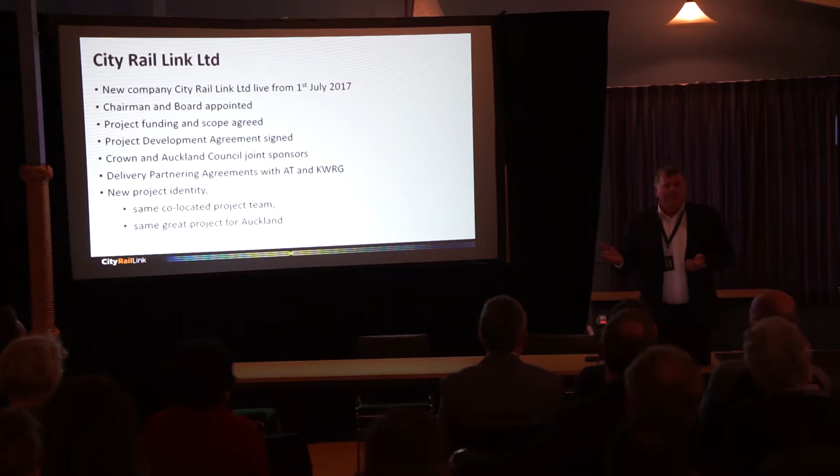So our identity changes. We are no longer part of Auckland Transport, although quite frankly we still work very closely with them because they ultimately, along with KiwiRail and others, will be taking the asset that we create once we finish. So a number of agreements are being put in place to make sure that that is happening and that we get all of their input into the delivery of the project itself.

So from a planned outcomes point of view, it's really important to restate this every time we present so that everyone understands what our objectives are, because we're delivering this amazingly attractive, safe railway that will transform transport through the city centre. Currently 20 trains an hour go into Britomart, and all of them have to stop. The drivers and train crew have to get out, walk to the other end, get in the other end of the train, and the train has to chug back out again. So that's 20 trains an hour.

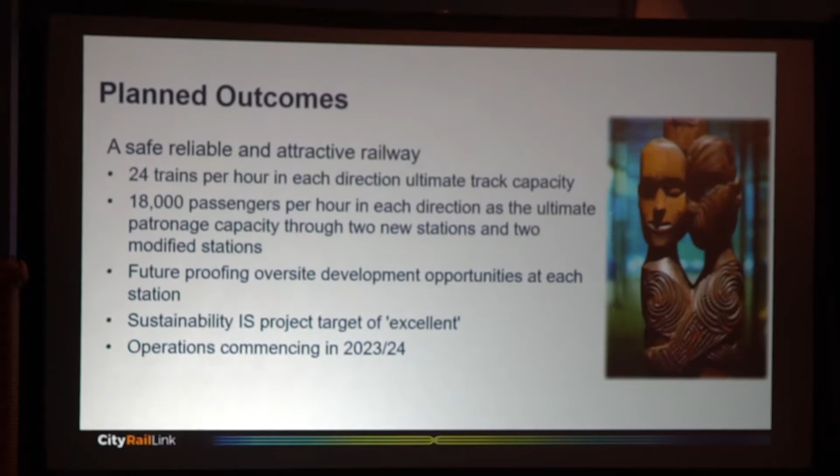We will be delivering 24 trains an hour in each direction, 48 trains an hour into the city centre, which means we have the capability of delivering 36,000 people into the CBD in the peak hour of every day. Now that compares with what Britomart currently has. In the peak hour it has about 8,000, 7,500. So this is a real step change in the way transport can be provided to the city centre.

We've got the future-proofing that we provide at each of our stations for commercial development, because that's the right thing to do. We're not commercial developers; we are future-proofing for that to happen by others. So we provide the extra concrete and structure in the ground to carry the load points to be able to develop above the entrances.

We're aiming for the project to be incredibly sustainable. Some of the new practices we're bringing from a sustainability point of view are being borrowed from our cousins in Australia, but tweaked for our use in New Zealand. But we're breaking new ground, and we're also exceeding our targets of excellent in the IS rating table for the works that we've already done. So we're ahead of target already, and we aim to stay there.

From a point of view of the completion, everyone gets worried about when we complete. All of these big projects take time, and I'm quite used to that. This is the 4th big project I've worked on, and we're due to complete in 2023-24 and commence operations. So these things do take time, but that's nothing to be worried about. If you go around the world, it's a fairly typical timescale for projects of this size.

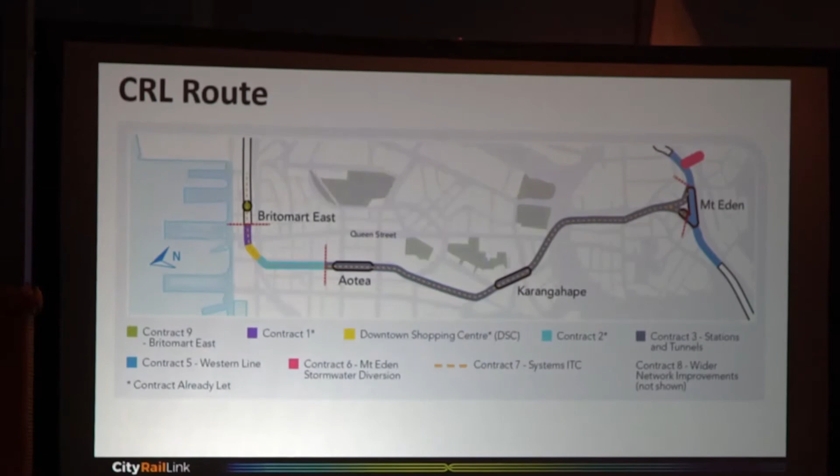And the difficulty there, of course, is that we go through a whole series of different geological layers, and we call this climbing the hill. Railways don't like hills by and large, but we have a 70-odd metre difference between Britomart, where the tracks exist, and the Western Line at Mount Eden, where the tracks exist, and we must join the dots. So we have to climb at a 3.5% gradient through very soggy, waterlogged mud at Britomart, go through some quite soft East Coast Bays sandstones going up Albert Street, until we get to the station at Aotea, level platform.

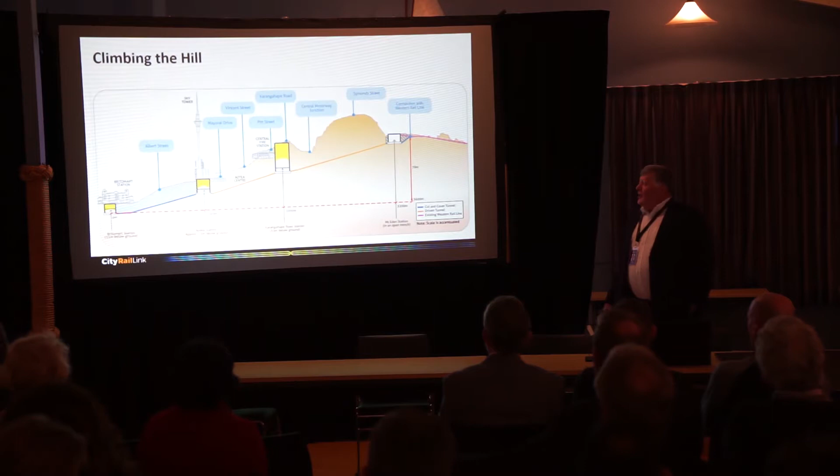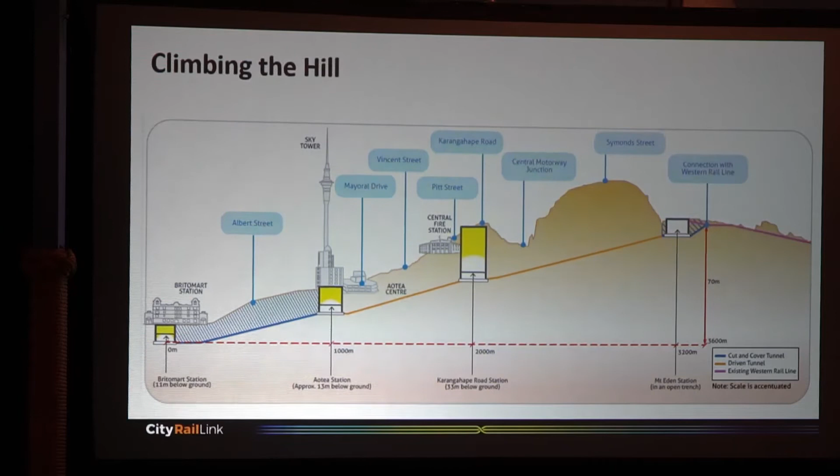Climb again at 3.5% grade, going up towards Karangahape, where our new station sits roughly between Pitt Street and Mercury Lane, and then the level platform again, of course, and then climb at 3.5% grade all the way up to the point where we break surface at Mount Eden, and we're into basalt, which is blasting material. So very, very difficult geology across the whole range of the areas across the route.

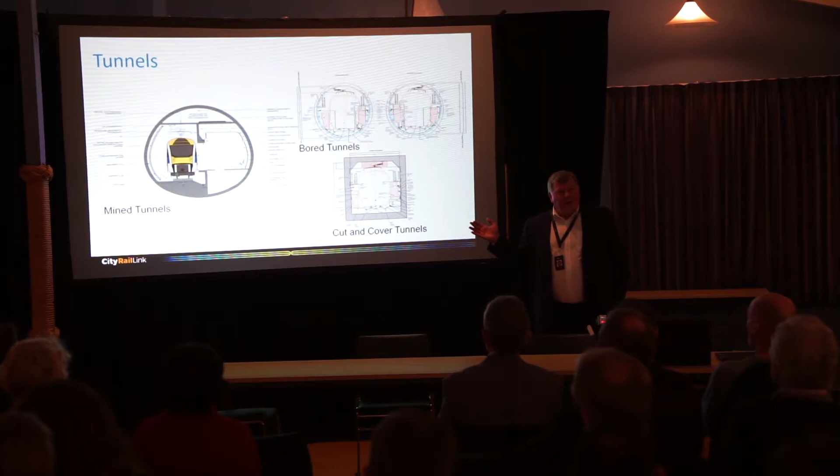Now we do this in 3 different ways. We have our cut and cover tunnels. These are the ones that are being built right now that you can see being constructed in Albert Street. Once we get to the station at Aotea, that's a large top-down construction box, around 300 metres long, which contains the 150-metre platform plus the plant rooms and other things that have to sit at the end of the platform.

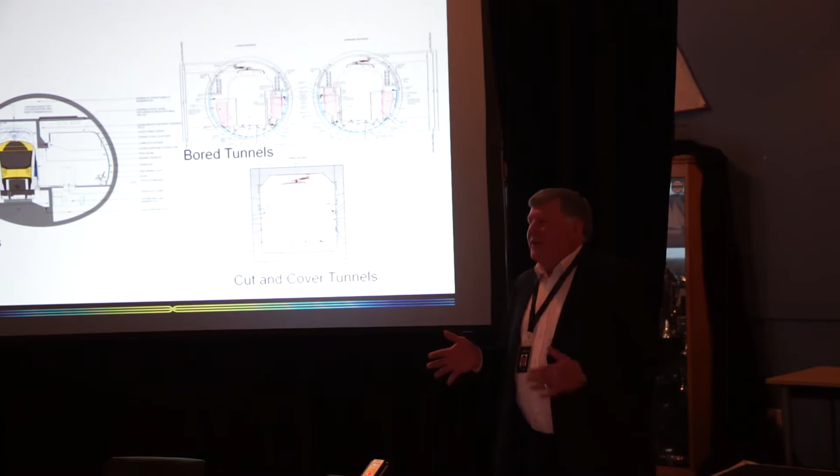And then we continue on in the bored tunnels, which are the 6.8 metre or so diameter bored tunnels, and then arrive at Karangahape Station, which is a mined tunnel station, where we have 2 mined tunnels of about 12 metre diameters, although they're never round, they're always squish-shaped, which then each contain a platform with a central concourse space, and linked up to the surface via inclined escalator shafts, again in mined construction. Those are typical construction techniques for tunnelling projects. What is unusual here is the geology and the way in which we must be very careful with how we go through the geology.

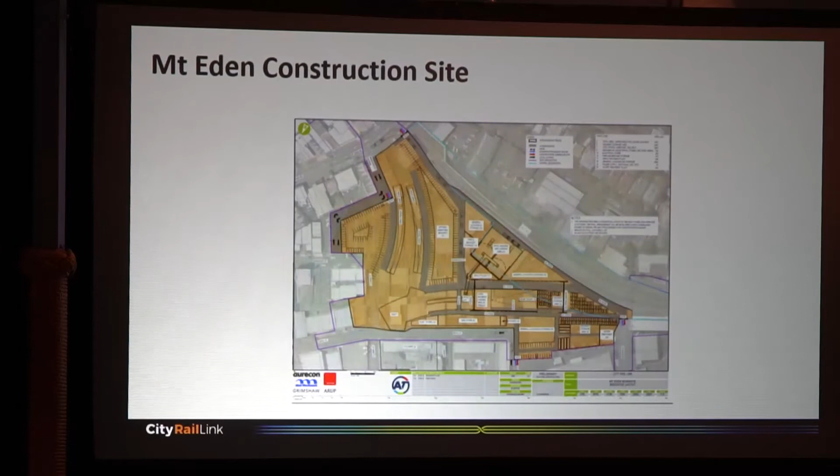And of course, to make sure all of that happens, we have to have a huge construction site, a logistics construction site, which is already obtained. We've already bought all the land at Mount Eden. It's about 2.4 hectares in size, and that will be the point at which we launch the tunnel boring machines, going down to Aotea once, lifting it out the shaft. Great photo opportunity. I can tell you when that happens. You should be there to take a photo.

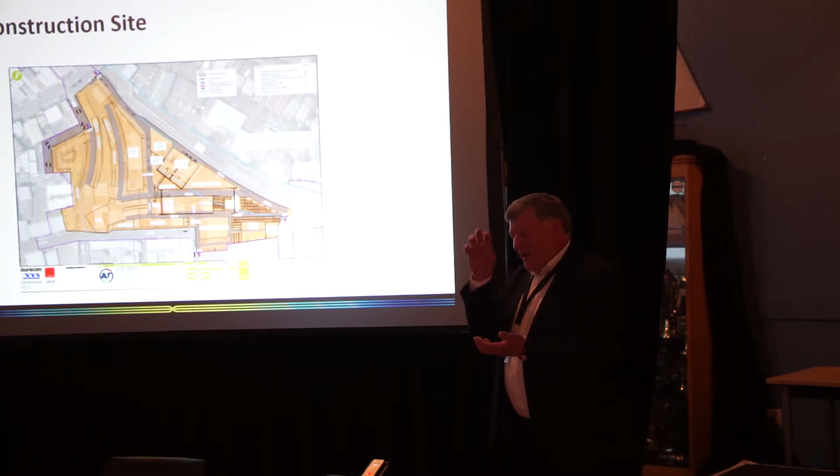They load it onto the truck, take it back to Mount Eden, and then they bore the second bore down. And the reason it has to be done that way is you need 2.4 hectares to do it. And you haven't got 2.4 hectares of land in the centre of the city, so you have to do it that way. It has to be down, return, and then come back again.

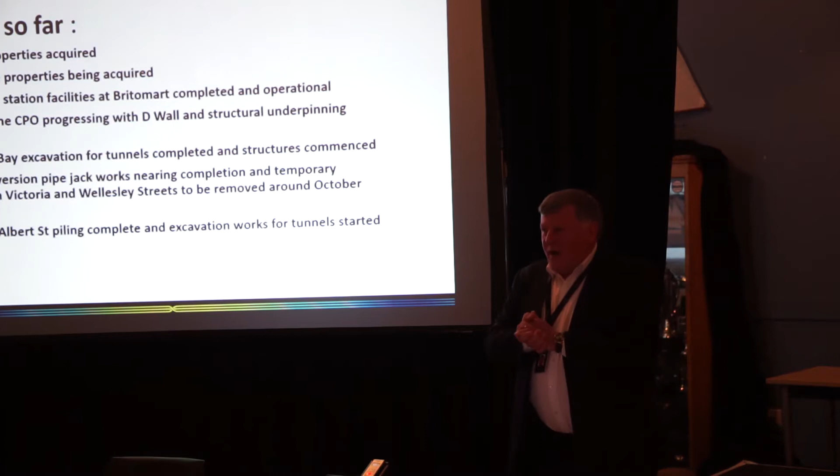So the story so far. Well, we've got all the surface properties acquired. We're acquiring most, if not all, of the subsurface properties, because of course New Zealand's a bit strange. You own the land to the centre of the earth. It's not the same where I come from, but that doesn't matter. So we have to acquire all of these little bits of land underneath properties as well.

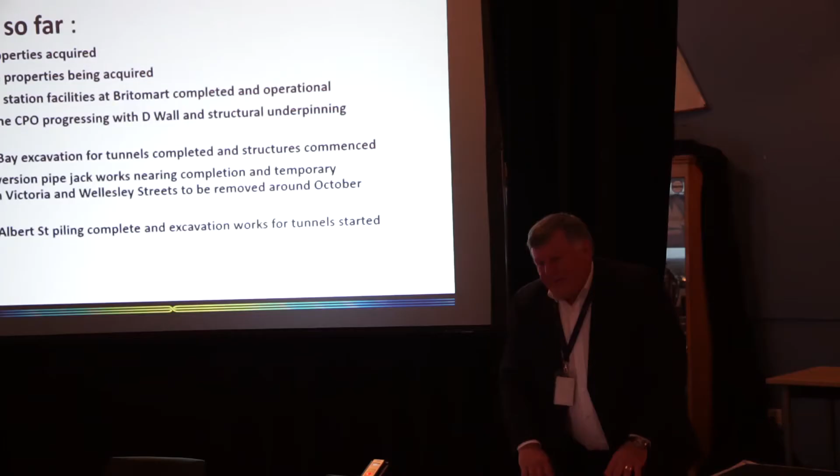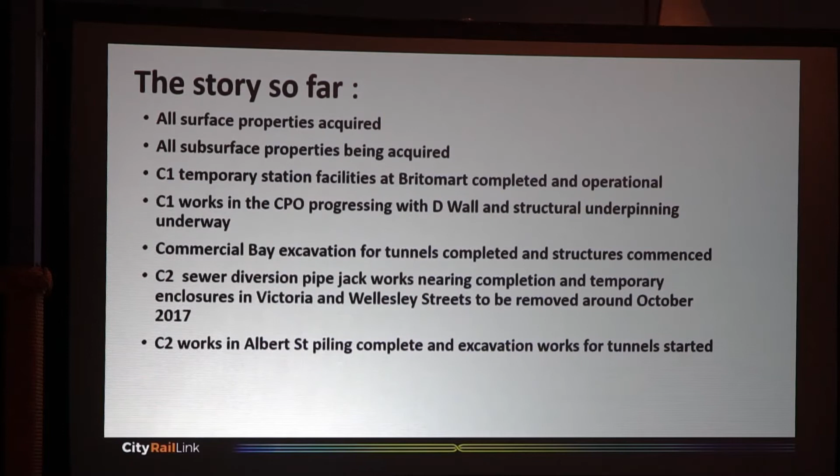So our temporary facilities for the station at Britomart, that's already built and operating, opened on time after Christmas, doing a great job, because that allows us to get everybody out of the station in terms of the facilities to do the work at Britomart station itself. Contract 2 is the work that goes through Albert Street, so that is proceeding, that's been let and is contracted, and the works are proceeding really well.

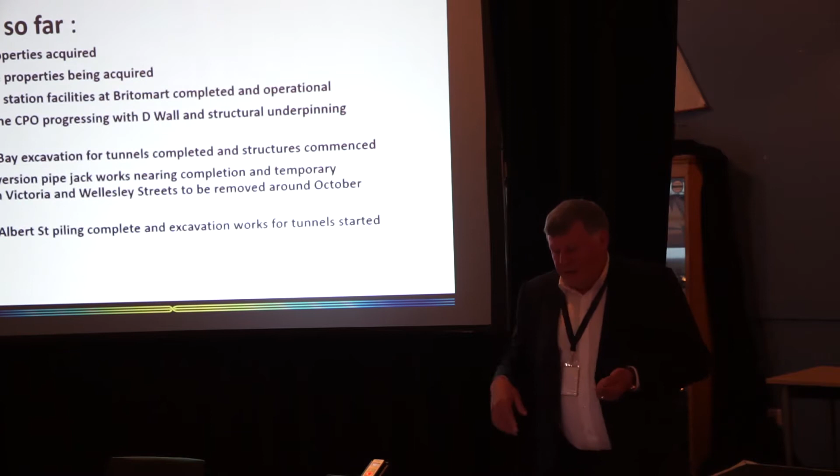And from there we have to get into our procurement space for the rest of the project. So the project's split up into 9 contracts. So contracts 1 and 2 are already happening. Contract 3 is the rest of the tunnels and the stations. Contract 5, there isn't a contract 4, C4 was thought to be a bit dodgy. Contract 5 is the work along the North Auckland line. So that's all in the operational envelope of the existing railway, so it's sensible that it's partitioned off.

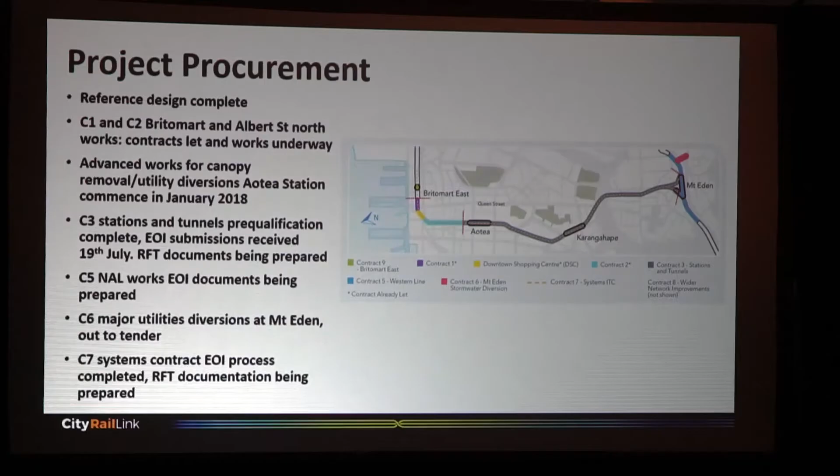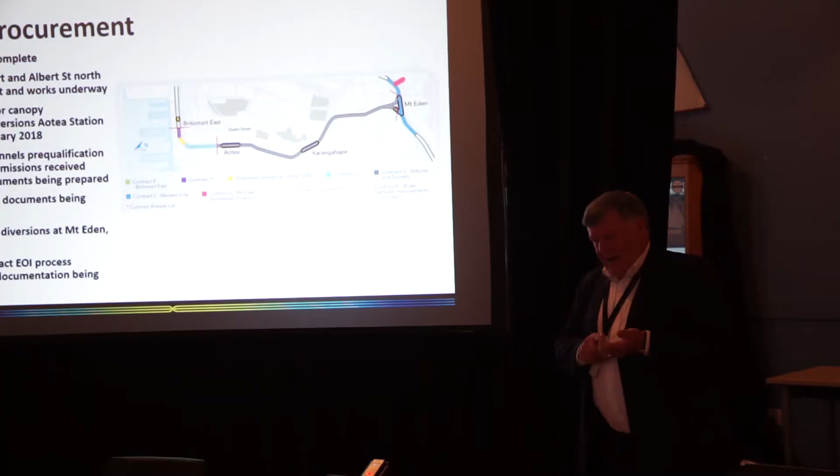Contract 6 is a major utility move up at Mount Eden. Contract 7 is all the systems, line-wide systems, right the way through the whole project. Very complex, signalling, track, overhead wire, all that sort of stuff. And then we've got Contract 8, some things we have to do on the wider network that are beyond our city centre location. And then Contract 9 is a little piece of work, very important piece of work, that we can only do once operations start at the east end of Britomart. So that's the final contract piece of the jigsaw.

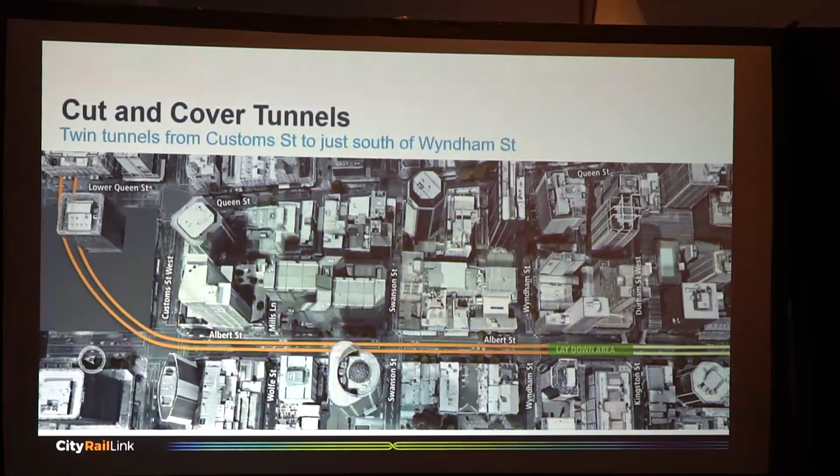And the cut and cover that I've described, those of you who haven't been to the city centre, I'm sure you've seen it already. Basically from Wyndham Street through to Britomart, crossing the area of Commercial Bay under construction. They are constructing those bits of tunnels for us. And if you look down in the hole, you can actually see the formation of those tunnels now. And then through to Britomart itself, where Chris will show you the detail of what we're doing in there.

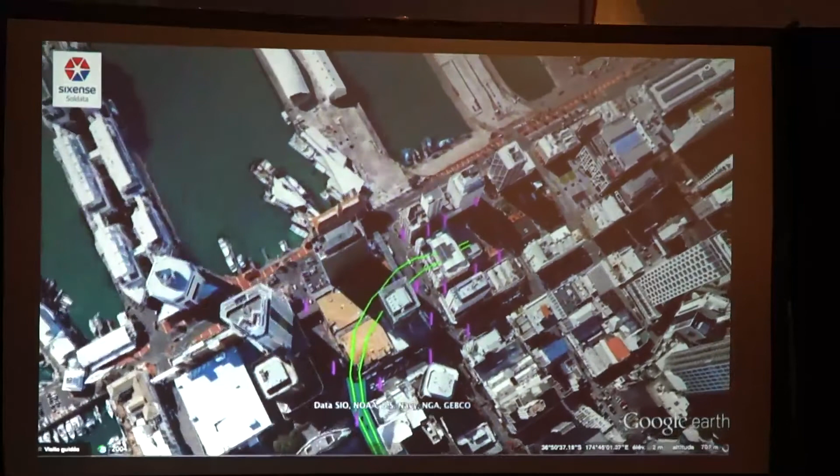So this is an interesting little video clip of the protection systems that we've put in place up Albert Street. Everyone thinks of, well, what's big holes in the ground, and bear in mind these holes are 17, 18 metres across, 15 metres deep. What's it going to do to my property? Well, we've put in place a complete laser monitoring system right the way up the street to detect every single movement. And if you go down Albert Street, you will see a whole host of little white discs that are parked on the footway edges and on buildings and so on.

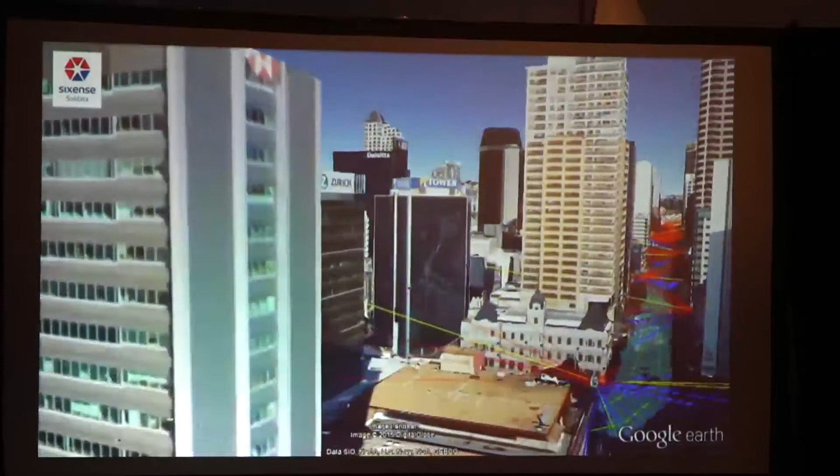And each one of those is reflecting a laser pointer that is then bouncing the signal back to a central computer, and that central computer is monitoring every aspect of the movement of buildings in the city as we're doing the works. It was quite interesting. Work nearly stopped one day when there was a huge spike in the movement of properties. It was the Kaikoura earthquake. We detected it on our detectors, even though we couldn't feel it ourselves.

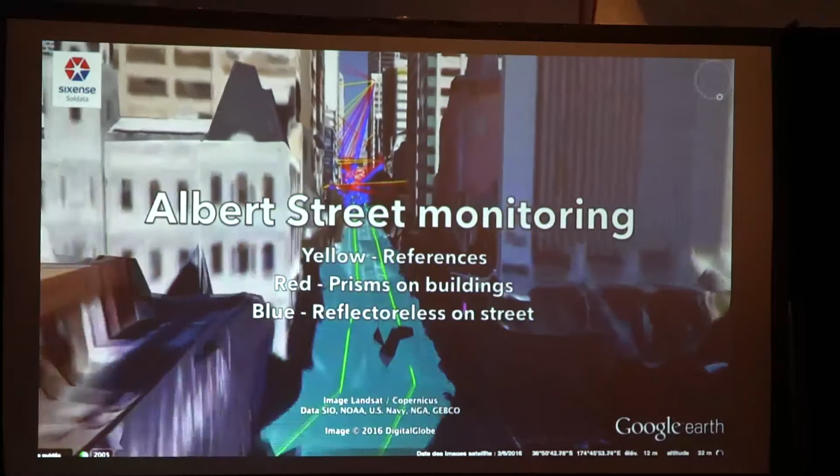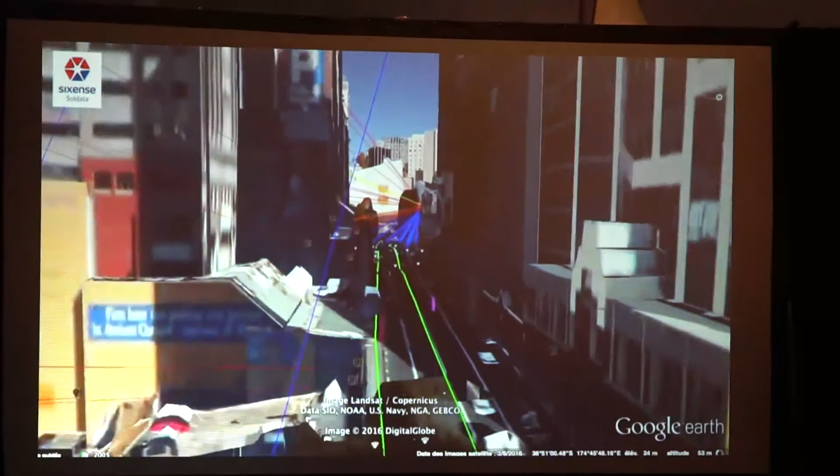So this is just typical of the kind of sophisticated technology that underground railways have to utilise to make sure that we can monitor safely all of the buildings around us, to make sure that they don't move, crack, and do things that were unexpected. We expect movement, but always within tolerances, and therefore anything that steps out of the tolerance, work stops, construction reviewed, steps taken to correct. So this is a typical way of maintaining the balance.

Just a quick question. Will they stay there forever? No, they stay there beyond the completion of construction. I can't remember the timescale here, but it's usually for several months afterwards, and then they're removed once you're confident that the ground is settled as far as it's ever going to. They did that same system in London on the underground tunnels for Crossrail, underneath the Thames. Yep, they did. And they had a whole bunch of historic buildings. Absolutely. I had to get several of those consents for those heritage buildings to put the damn things there. Always difficult.

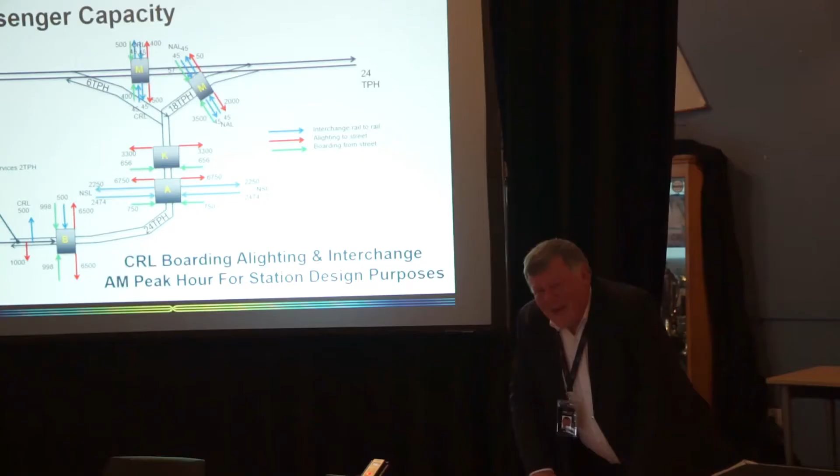So passenger capacity, this is all about people. I used to teach a course up at Birmingham University in the UK, a master's degree course for engineers and architects about railway design. And every time I did it, I'd get a £20 note, slap it on the desk, say, hey, rich consultant, poor students, tell me the first question you ask the client when you're given a job to design a railway station.

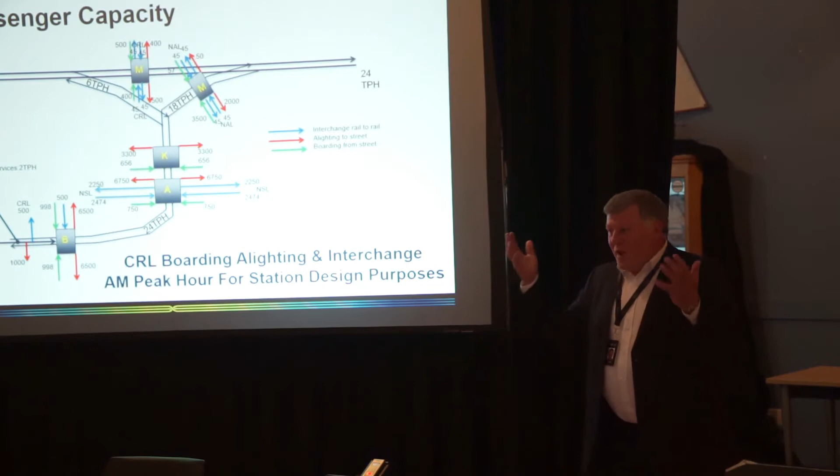And of course they'd say all sorts of things like ground conditions, length of the trains, all this sort of stuff. It's the people. How many people? If I were to ask anybody in the room, what's the first question you ask if you had to design a football stadium? It's how many people? So why do people not understand that railway stations are about bloody people?

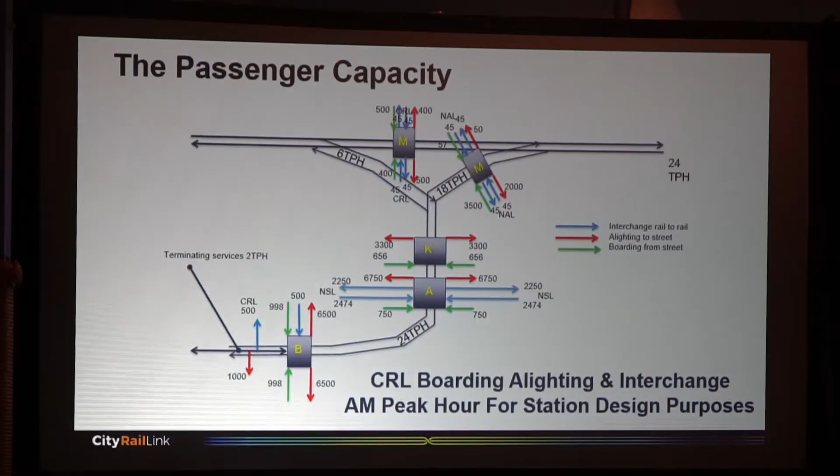So the issue here is, how do you define what it is you're designing for? Well, our capacity is based on full trains, 24 of them coming in from each direction, discharging all of their load, leaving empty.

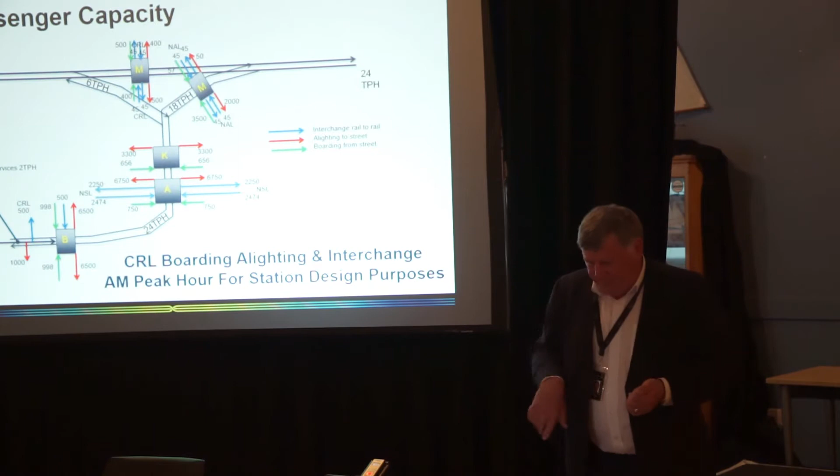So, how do we know that everything works when we've got... that one won't work, will it? I can't get the second one to work because it's not a touch screen.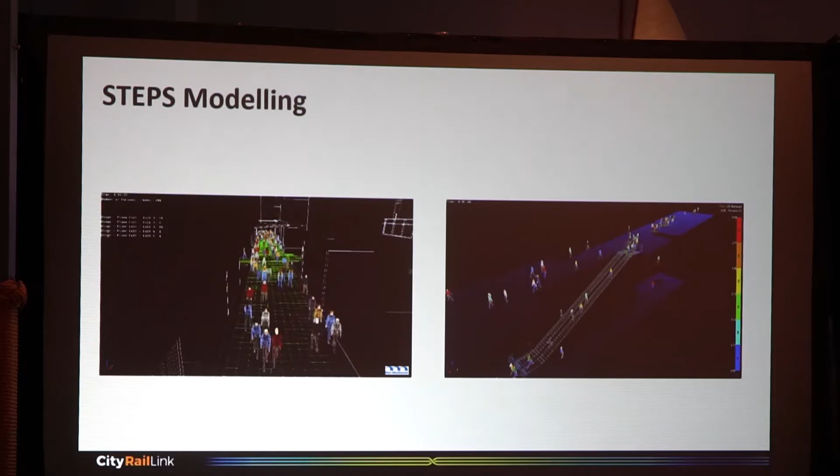Anyway, how do you know that it all works? Well, we test it. We test it through STEPS passenger modelling, and this puts real people in real numbers in 2046 or whatever the date might be that we decide, and it tests the space with variable speeds of walking, people with pushchairs, people with wheelchairs, luggage, and we test every aspect of our design to make sure the size is right for the future-proofing for the railway going forward.

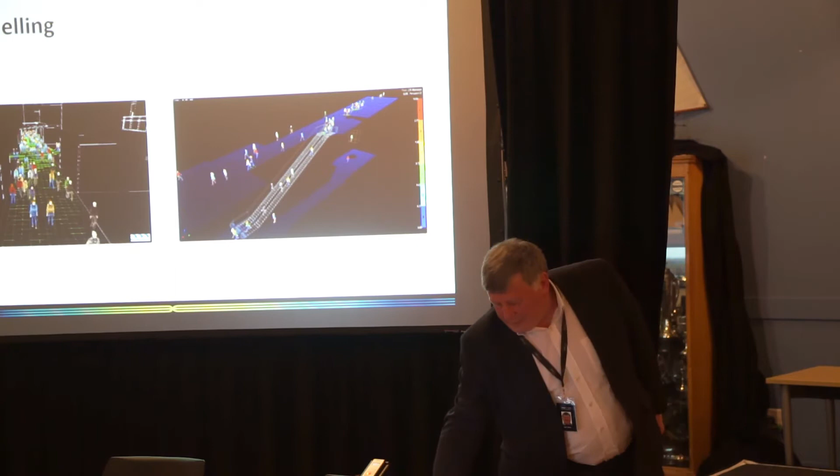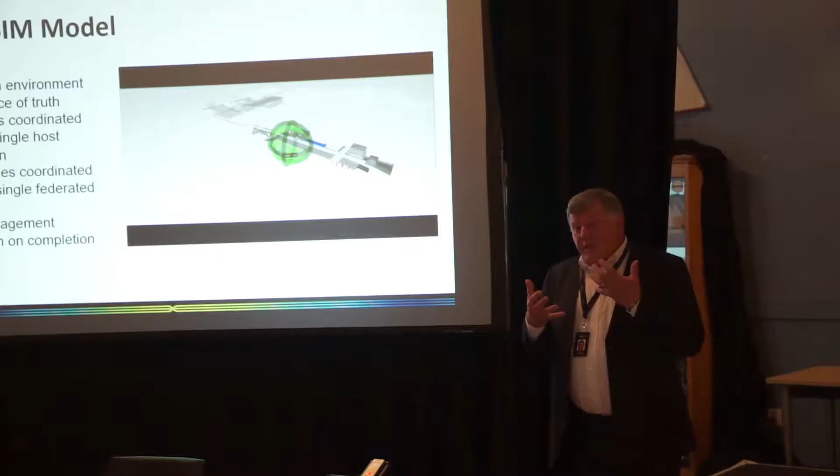We also have a single... got it working, right. We also have a single source of truth in the BIM model. So this is a single federated model produced by the team, which Chris's team and the Aurecon team put together, which actually takes every aspect of the design and puts it into a single federated model. It's not all Revit modelling, some of it is other models as well. They're federated into a single three-dimensional object, and basically every aspect of our design plugs into that.

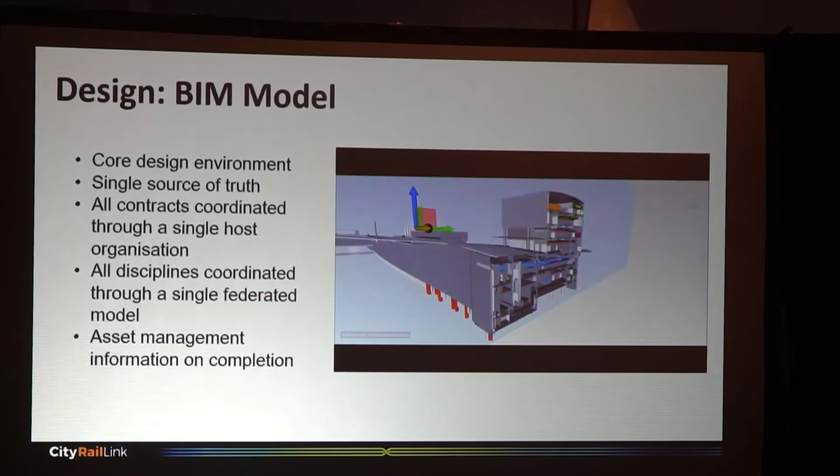It enables us to check to make sure the ducts, the ventilation ducts, the platforms, the kinematic envelope for the train, all the beams, all the structures, all the piles actually work and fit together. And these days we rely upon this and not drawings. And that's the big departure. So when we go to tender, we will be going to tender on a BIM model, not a set of drawings, as part of the tender process.

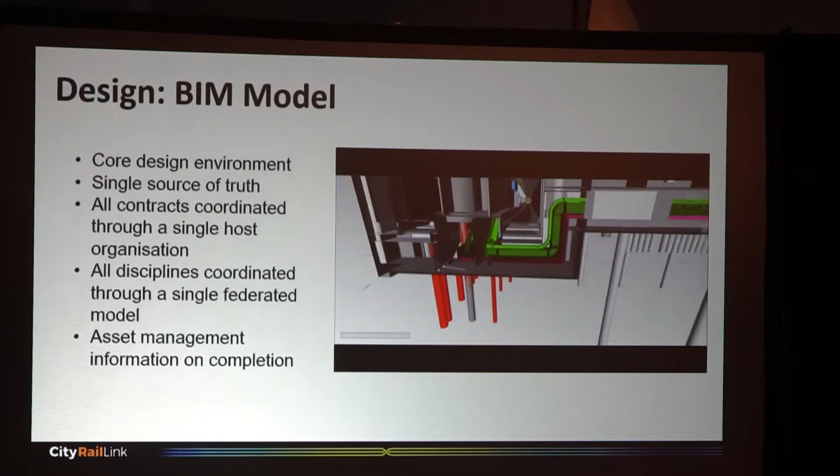So you can see this helps us coordinate every aspect of the very complex plant and equipment that has to go in each of the stations, particularly because the stations are the bits that carry the equipment for every other part of the project. Single source of truth. It is the future.

Chris, talk us through our design philosophy. Thanks, John. So I'd like to just take a little bit of time to talk about some of the stakeholder relationships that have informed some of the design. Through the procurement process, John talked at the beginning about the reference design, and for the last 3 or 4 years that's been around really proving the functional and technical requirements of the stations, the alignment, the mechanical systems, the architecture, so that we know everything fits and everything works.

That reference design will be taken by the bid teams and developed by the selected contractor into the detailed phase. So it is a design build contract. But obviously, what's important to us is what is the identity of the station for the city, and how do we protect that through a design build process. So a lot of the work has been engaging with mana whenua, engaging with the city, engaging with the key stakeholders, and setting up a framework which we hope will protect that design integrity through the process. Mana whenua has been a very key part of that journey.

So there were 8 mana whenua who identified their interest in CRL very early, and have very much been part of not just the design process, but the relationship process. So very much across the procurement, across the sustainability, across the consenting processes. So that's written fundamentally into the NOR. We've had hui every month for the last 4 years, and we have a design forum hui on a fortnightly basis, and that's an open forum to discuss all matters of design with all our key stakeholder parties.

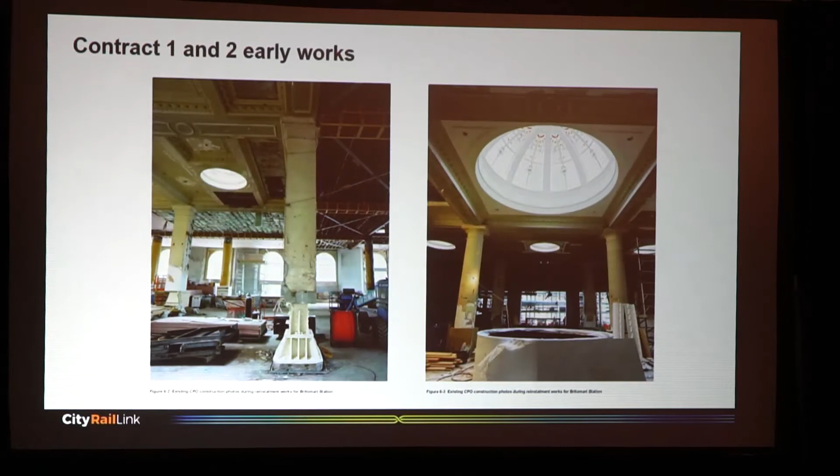So we were here 12 years ago, and we wonder why we didn't do it the first time around, but that was Britomart V1. I'm not sure if everyone is aware that at that time the outermost platforms do have light rail tunnels, which were the future at the time, and the only problem was they wanted to rise up and come through the CPO and out through the front door.

Can you imagine what that would have done? Not sure what we were all thinking back then, but this is where we are now. So Sandrine's just parked herself into the CPO over the last week, and she's about to make her way, starting with all the D-wall installation through the CPO. So the construction of the main tunnels, I think. Gonna work at that? Great.

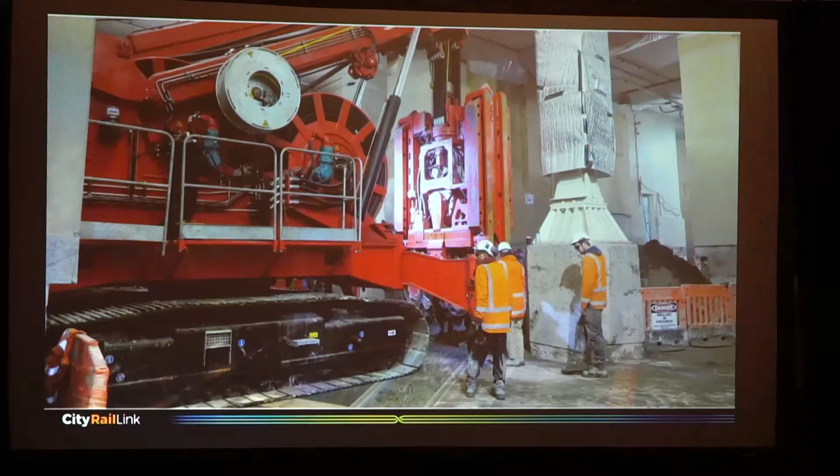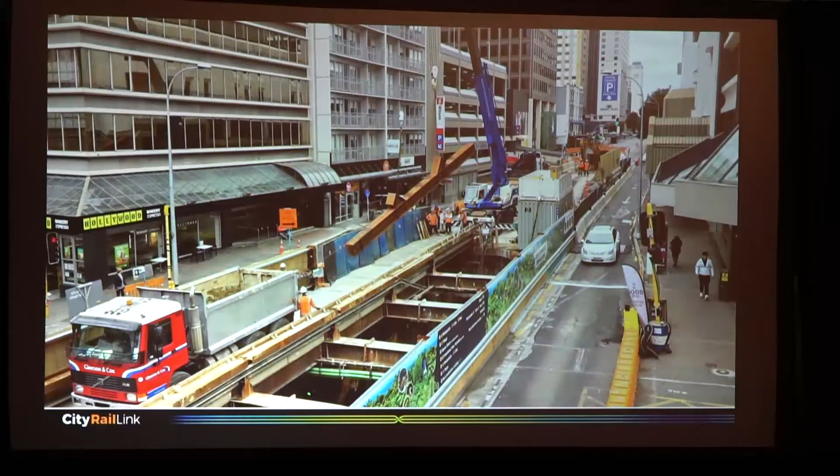And there was a lot of discussion initially to retain that, obviously to reflect the old banking chamber, and we thought we might have a bit of a battle, but everyone understands now the nature of the capacity, as John talked about. So the big moves here are to move the gate line from where it's currently located down on platforms. As we see a significant increase in the capacity of the station, we really need to deal with that up at the concourse level to preserve all the safety and security of managing a much busier station. So the banking chamber is removed.

We still reflect the nature of that old historical chamber within the floor, and we get a good reinstatement of the CPO with adjustments to the ticketing and retail aspects of that ground floor. One of the significant wins is the reinstatement of the lower Queen Street area.

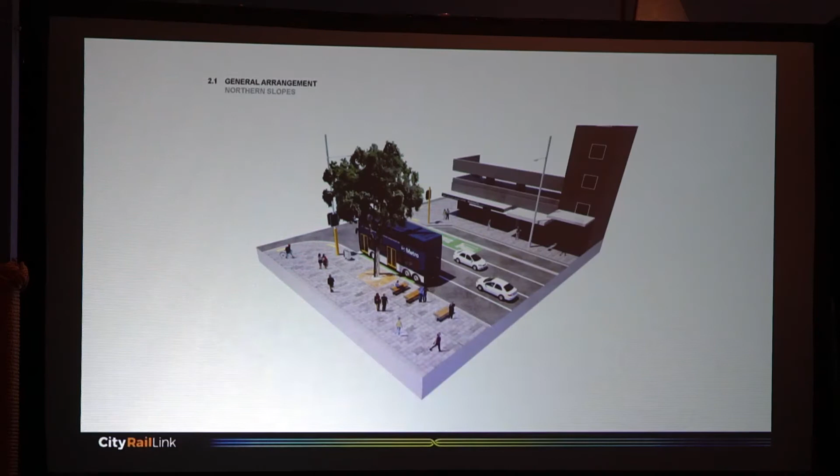As we make our way up the first phases of Albert Street, after the cut and cover, we start to reinstate that. It is a civic PT street, but we'll see a significant improvement in the width of the footways up Albert Street, and beginning the character of the future Albert Street as it gets reinstated as part of the C3 contract. Just a view back towards the water, one of the key characteristics of Albert Street.

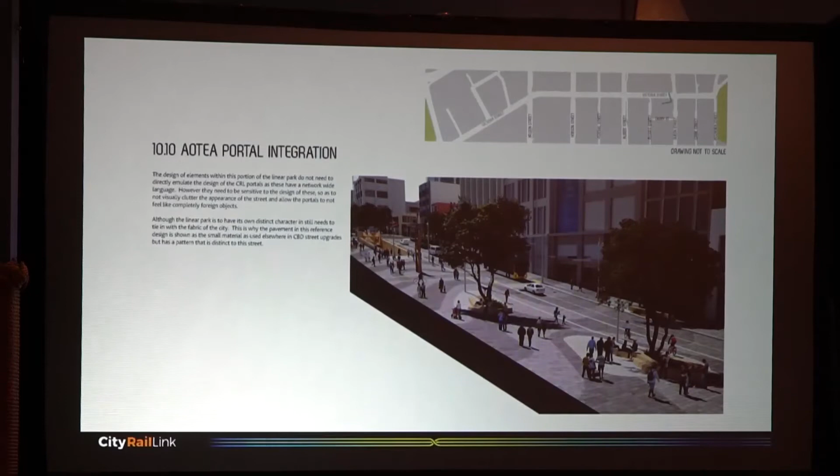And I guess what CRL is doing as an enabler is lots of key interdependencies and enablers of other activities happening around the city. You'll see the ADO with the council published recently the focus of the specific waterfront area of the master plan. Other key moves are the green link as part of the Victoria Street upgrade. So CRL is an enabler of that first portion of work around the entrances. So that's Victoria Street from Queen Street towards the entrance.

So when we embarked on the reference design, some key concepts were that for us, function, performance and personality should be treated equally. In the initial parts of the reference design we really had to knuckle down and focus on function and performance, and probably in the last year or so we've really started to up the personality, and that's been through some of the holistic design process with Mana Whenua, with the arts team at council and the wider stakeholder group. But it's important to wrap that within that idea of an ecology as a system.

So how do we create a unique New Zealand transport experience? It is an opportunity to tell a distinct story of who we are. London, Paris, when you start to look at precedents around the world, you see a very unique sense of place and culture and where they are. We've probably struggled sometimes to define the image of the city as we should see it and be confident enough to do that. And we feel they're cultural spaces as much as they are functional spaces, certainly in the sense of the significance of undergrounds and transportation networks. They do have a function to move people, but they have a cultural role, I think, of defining who we are and where we are, probably importantly.

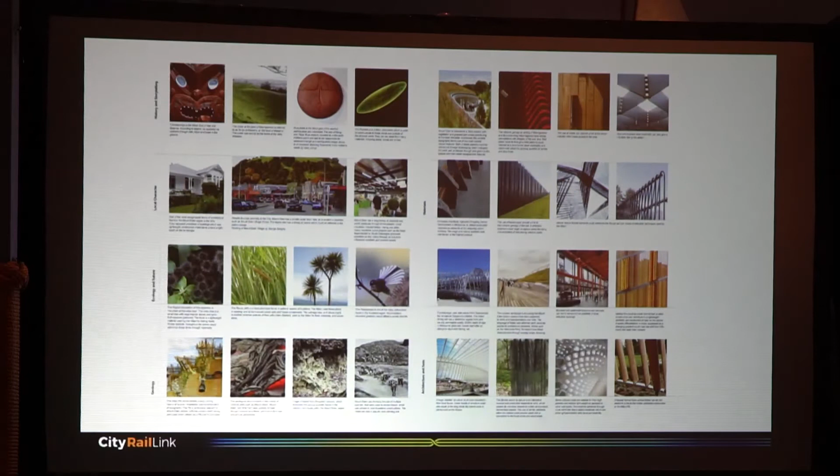So we did a lot of mapping with Mana Whenua. We did a lot of initial sort of... you can't define those things by yourselves. The image of the city is defined by the people who inhabit the city. So a wider consultation with those groups to understand what that might be.

And out of that, driven by Mana Whenua, was a key organising idea: the creation myth, the evolution of human life through Papatūānuku, was one that probably resonated when we talk about undergrounds and earth and sky. They're pretty relevant in terms of that journey from the sea to the maunga. So that was an interesting one to start to understand how that might be expressed in the architectural response of a station.

I guess the key thing about that journey was that there's a vital element of stations, which is the threshold. So how the entrances, that process of transitioning from sky to earth, might be celebrated within a journey, a customer experience of a station, and how that might manifest as a building as a diagram. So a little bit of modelling to understand what that might be, and so we've come up with a term for the sky.

And these are when we start to understand the functional requirements of the station. With the big underground stuff, we've got all our TVS and plant and equipment that has to go somewhere, and it's above ground. So our sky elements generally are dealing with quite complex air and ventilation requirements, and the earth elements are dealing with all those human interactions of people engaging with the entrances and the platforms themselves. But this compelling idea around the tension or the threshold is an opportunity to celebrate a day-night condition and engage with further artistic expression.

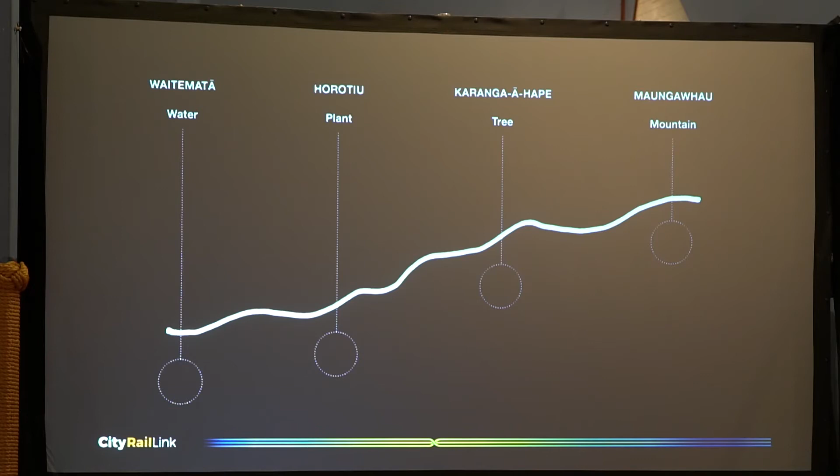The unique journey for the CRL, as John said, connecting the dots from Waitematā up to Maungawhau, is that transition of quite interesting geology, but also place. From the sea to the maunga, through the valley at Aotea, up at the ridgeline at Karanga-ā-Hape. So some very clear distinctions of unique historical significance, some narratives, and the geology and nature of place. So those were important to understand and how they might inform the evolving design.

The Horotiu stream ran from the valley up at Myers down to the Waitematā as a key idea, given the rail almost follows the old pathway, that it was a place of abundance. It was a place of people coming together and making. So this idea of the piupiu and the craft. So those were interesting expressions.

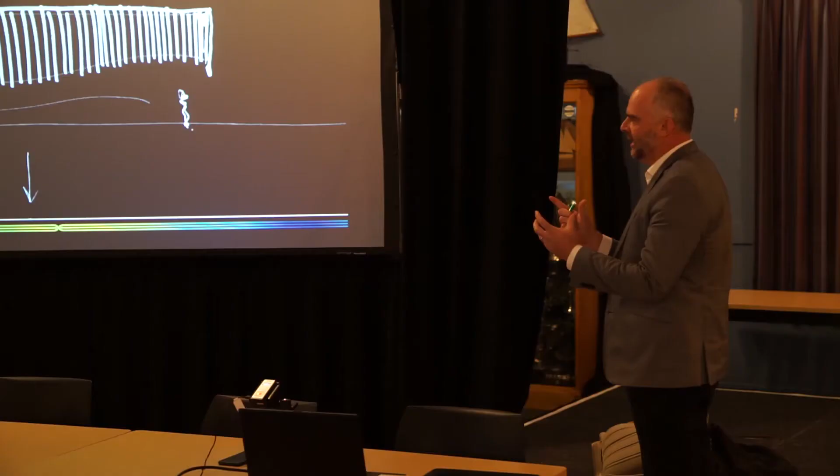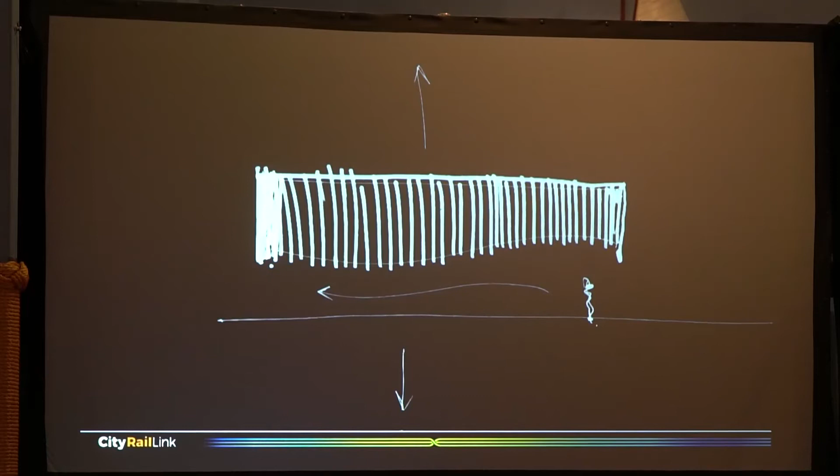So really what we started to look at is how do we preserve an idea, and the thresholds really became an opportunity to celebrate holistic design, not just defining an architecture of something, but how might we have an element that expresses a collaboration of Mana Whenua, of architecture, of art, of sound, of light. So the thresholds will be those unique opportunities to define each station's sense of place.

So as an idea, there's a sense of the Taniwha, the piupiu hanging, that vertical element, the underside referencing the flow and nature of that Horotiu stream, that it would be dynamically lit, that we're exploring the idea of sound interaction, that it might be kinetic in its movement. But the evolution of that will be through a collaborative design process with mana whenua artists, with sound engineers, and so really as an opportunity for an identity that's going to be a key exploration for us.

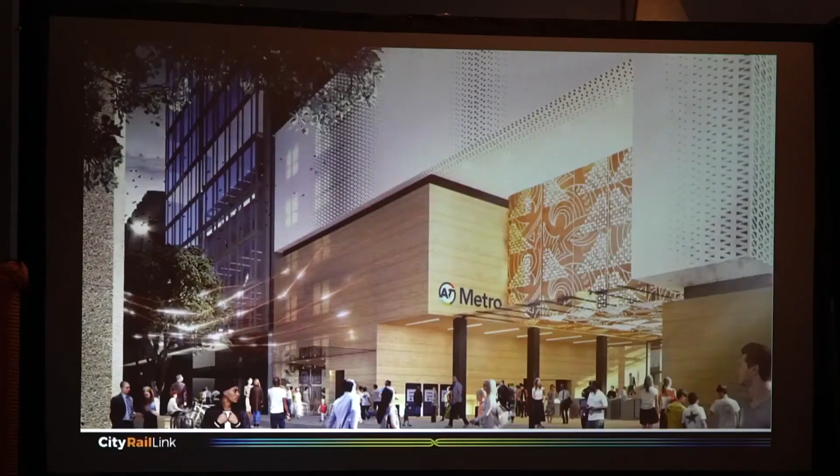Wellesley Street entrance at Aotea is next to Bledisloe, and we're setting up an opportunity for a laneway connection down to the square. And what you're starting to see, as John mentioned, was a preservation of oversite opportunities with a bit of a construction yard at each of the sites.

Obviously, a significant one at Mount Eden is ensuring that the station didn't limit those. So, structural strengthening, the servicing of those stations, the enabling of those opportunities are key. We have a consent for a 24-storey tower over the Wellesley Street entrance in the outline consent, but again, that's given us a greater pointer to the structures that we need to put in the ground to carry the loads.

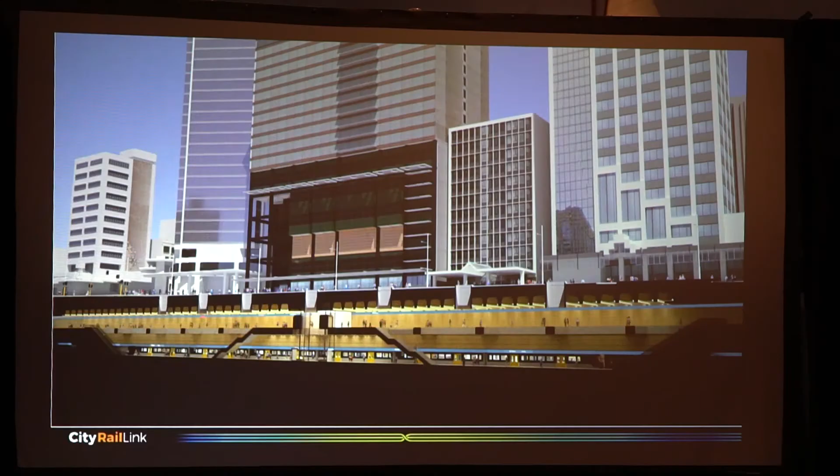So just to get context of the main platform, the sort of 200 metre long concourse sitting directly under Albert Street, and you can see the council building there, and obviously Sky City, and we've got skylights within a median running up Albert Street. Seven of them, referencing Matariki as another narrative exploration. The upper concourse, the platform itself, an island platform, and moving people off platform early through lifts, stairs and escalators at each end to deal with that capacity at the peak hour.

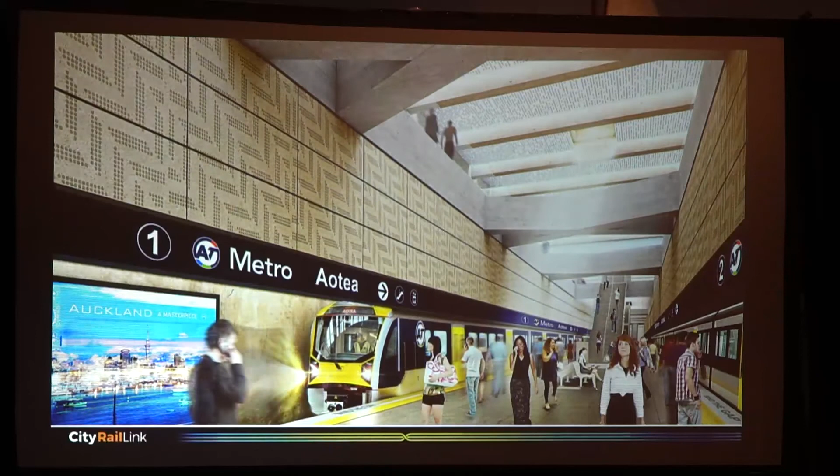And then looking down the platform itself with the up and down mains on the side, the volume of the concourse, and then the skylights running through the median at the top. So we're 9 or 10 metres below the surface at this point. And as John mentioned, this is now a consented scheme to preserve that OSD opportunity above the station. So the station capacity, its gravity capacity, its servicing capacity, its location of the core will support that future development.

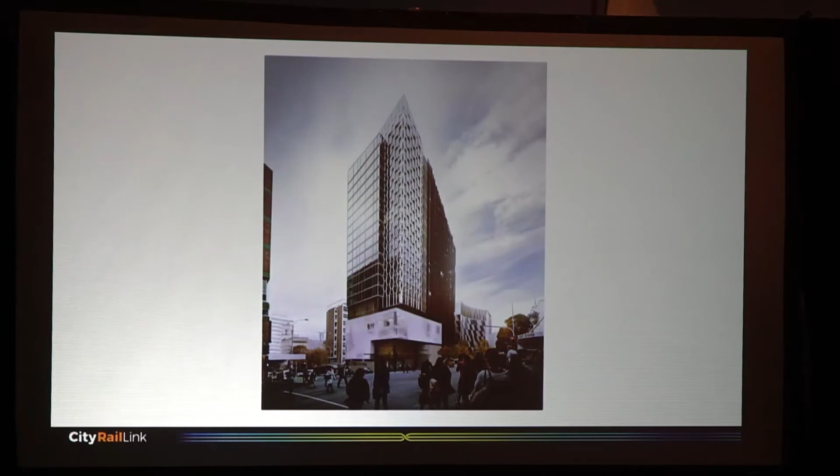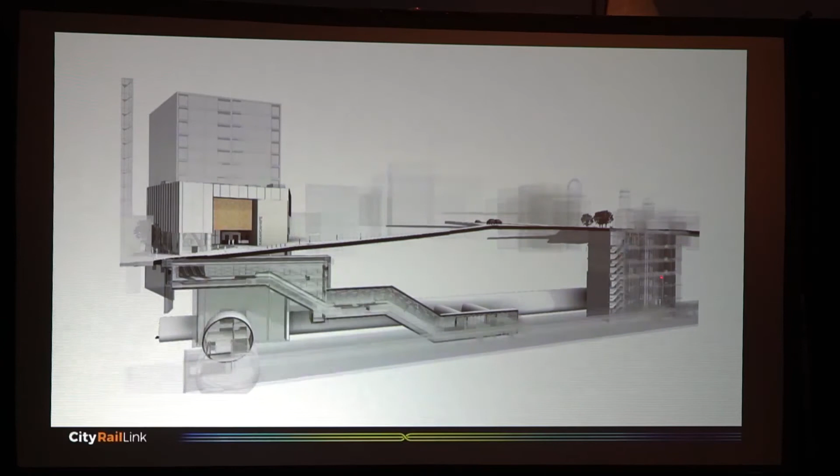So as we make our way up the ridge to Mercury Lane at Karangahape Road. We can see we've got a binocular arrangement, the more traditional underground arrangement. So up and down mains either side and adits with a central concourse and adit from the Mercury Lane entrance. The Pitt Street box here is the necessary tunnel ventilation, escape, and other functional rooms with the preservation of the future Beresford entrance through the concourse through to the central adit, and then effectively a separate station box and entrance can be constructed offline of the main Pitt Street.

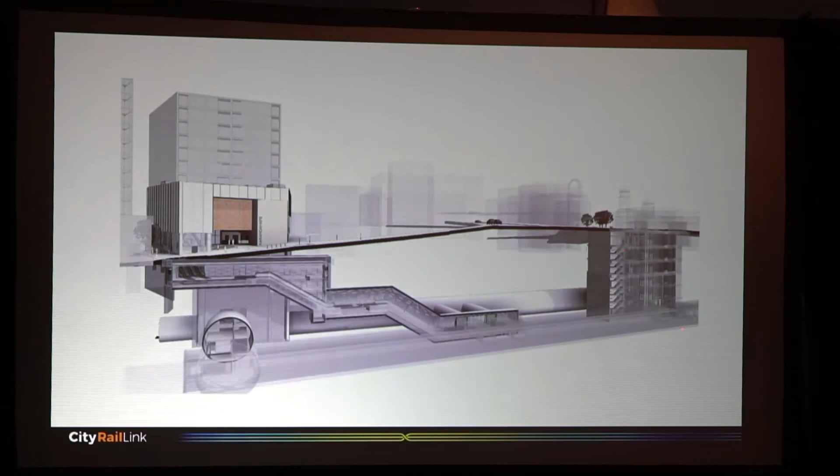So the significant advantage of the construction in this manner, the railway doesn't have to be shut down. You can maintain operations of the rail and build the future entrance at that point. John talked about capacity. The capacity of K Road is only necessary for one entrance, but obviously two are set up with the future enabling. And again, OSD enabled above the entrance up to the current height plane. So a more traditional underground arrangement with the side adits.

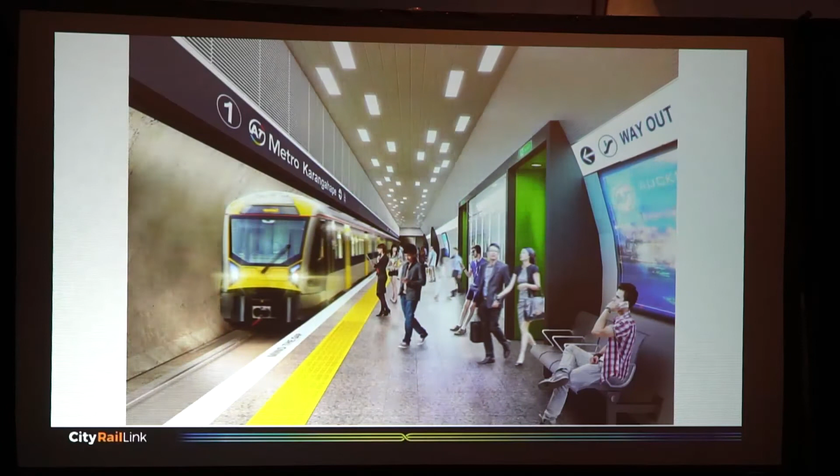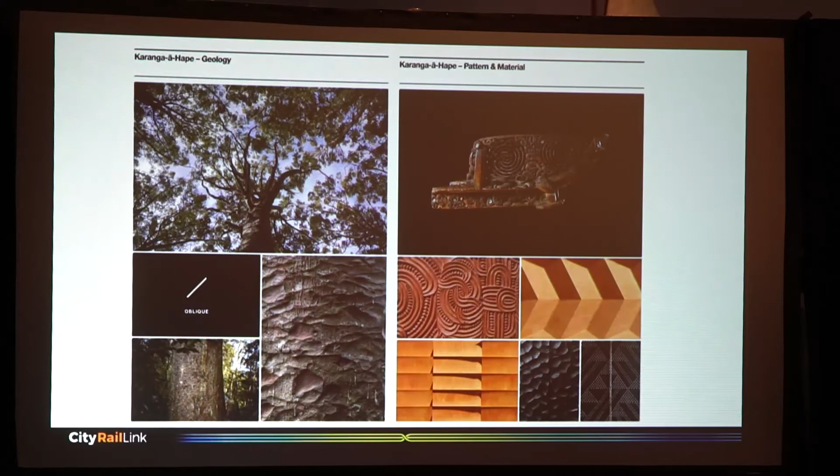So Tāne Mahuta was a significant narrative overlay for this station, and so an exploration of the nature of craft and carving, and how that evolves from the nature of the tree itself, and how that might manifest itself in a threshold here. And I guess the significance with this particular station is that 30 metre traverse down to platform; it's a true underground experience. So that journey of compression will be a unique one for the station.

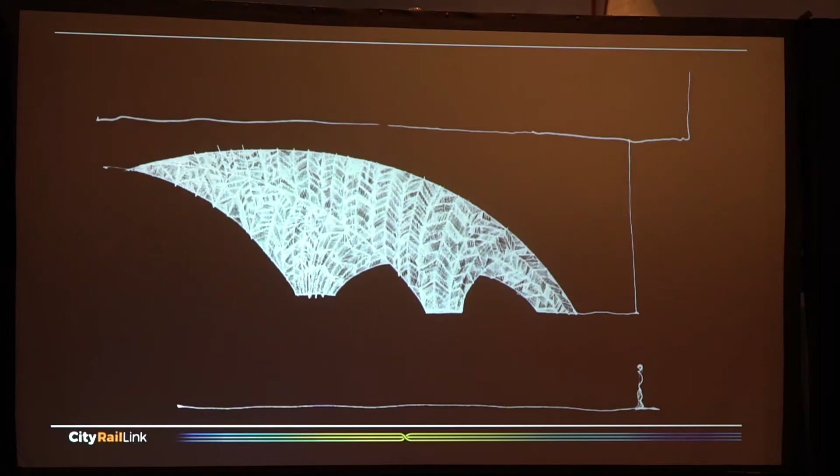So this idea of the canopy of Tāne Mahuta and its significance was one that's been explored. The volume's revealed at the entrance, and this is something that, again, through a collaborative contribution of craft, of making, of carvers, will be that holistic approach to the station identity at this particular entrance.

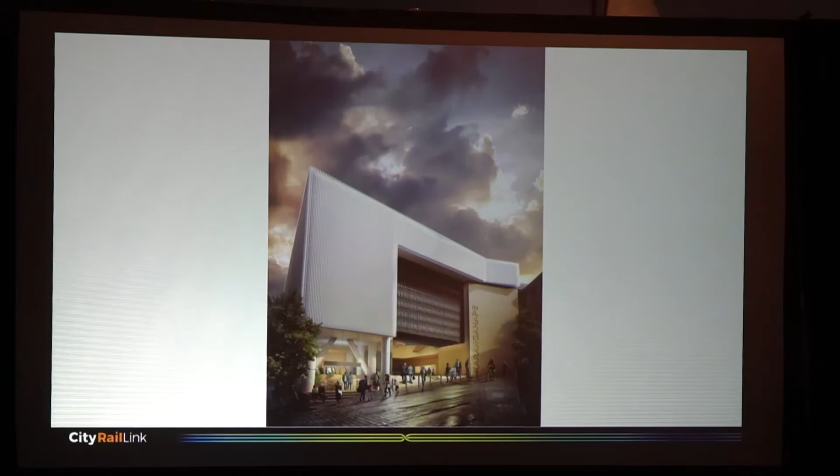Starting to see, following the reinstatement of the Mercury Lane construction site, the OSD opportunities and the opportunities to set up neighbouring OSD, and through the station siting a laneway connection through to East Street from Mercury Lane, to set up an enabling of a secondary laneway that might occur down from Karangahape Road.

And looking at the wider improvements of the public realm, in particular access from Karangahape Road itself, the widening of Mercury Lane towards that access, the sharing of surface around the station frontage to slow the traffic and to prioritise those connections. The future light rail station on Upper Queen Street is likely at the opposite end of Cross Street, so good connectivity and interchange between the two at that point.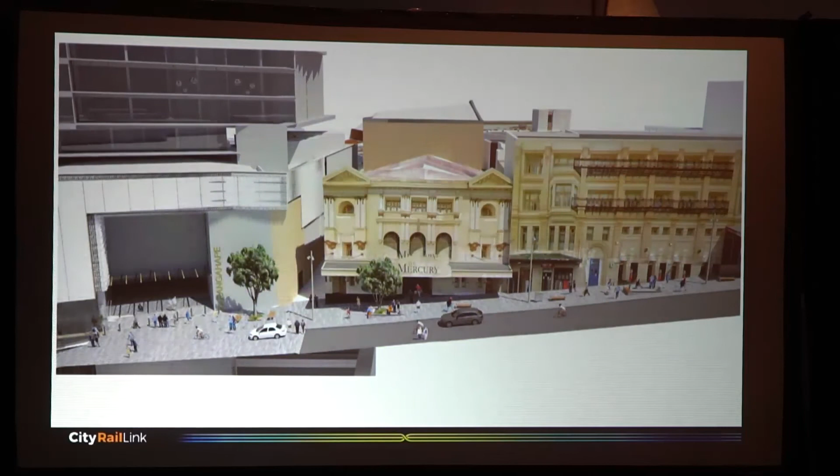We head up to Maungawhau, up to the mountain. Clearly, there's a strong relationship to the Maunga itself. The existing station is in a bit of a bowl, but the opportunity comes because of the significant 2.5 hectares. We've got a significant amount of reinstatement that we can enable back there. But the opportunity with the NAL at the moment is a lack of access, a lack of legibility, to really unlock the potential of that area.

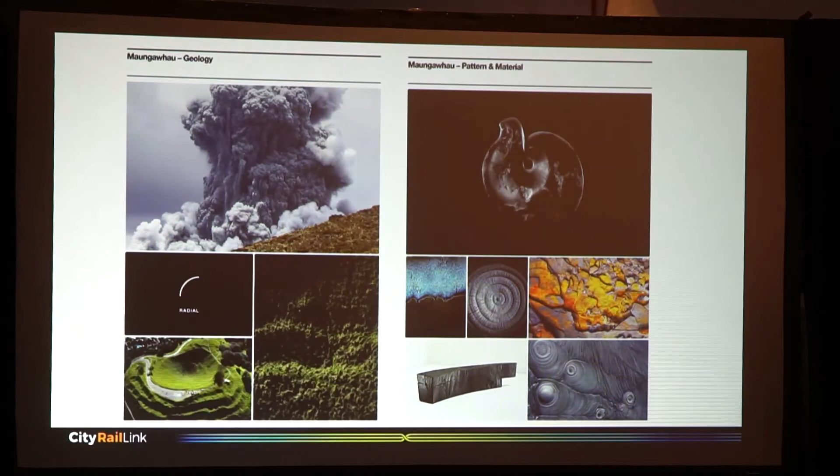If we look at Ruru Street, which connects from New North Road up here, that access is actually direct to the Maunga. So the orientation of the station itself and the new road network is setting up some really interesting opportunities in terms of those desire lines to the mountain itself. With this brownfield site, the location of the existing NAL platform to the south, and the CRL as it exits the trench at Karangahape Street here, the platform itself is a bit like a New Lynn typology. It's again about 9 metres in an open trench below the existing ground.

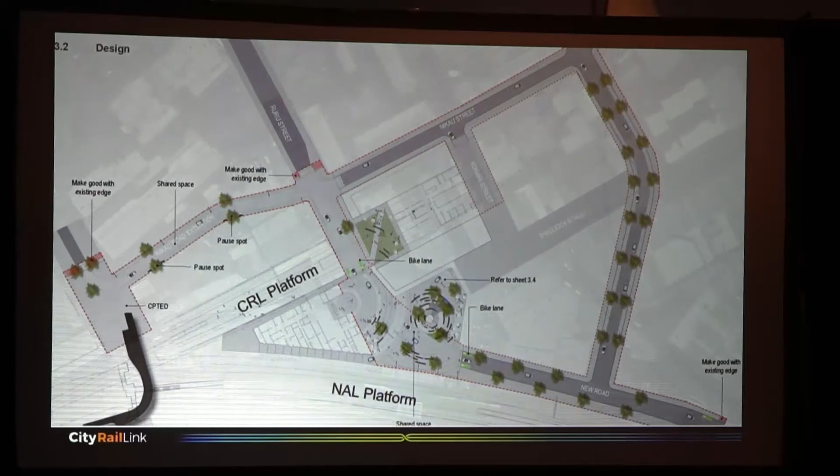The key move for us was really to link Ruru to Mount Eden just at this point here, and set up an address for the station. And then most of the roads connect off an existing street network, so Nikau, Flower, Nahura all start to set up a reconnected network. And so what we start to see is some sites which enable some sensible block opportunities, a mixed-use precinct. The station really is, again, the catalyst for that regeneration, looking to define a bit of a sense of place. It's a station with its interchange, with its increased patronage, becoming a place to meet and really kicking off the opportunity within that area.

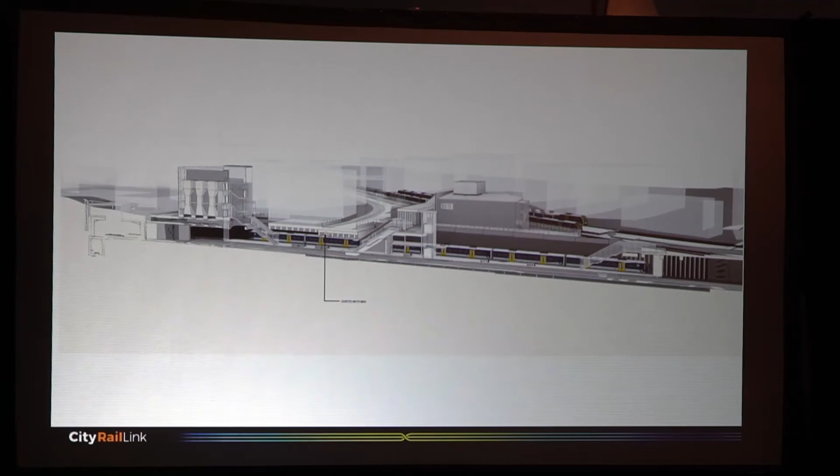So we can see the opening at the eastern end, the tunnel head house building here with the TVS, all the tunnel vent and kit, the CRL platform and the trench, and the station building located at Ruru Street with the NAL crossing over towards the western side. What might that start looking like is, again, that narrative of the Maunga starting to explore the opportunities that might present in terms of the plaza as a first. These are all the opportunities within the mixed-use precinct.

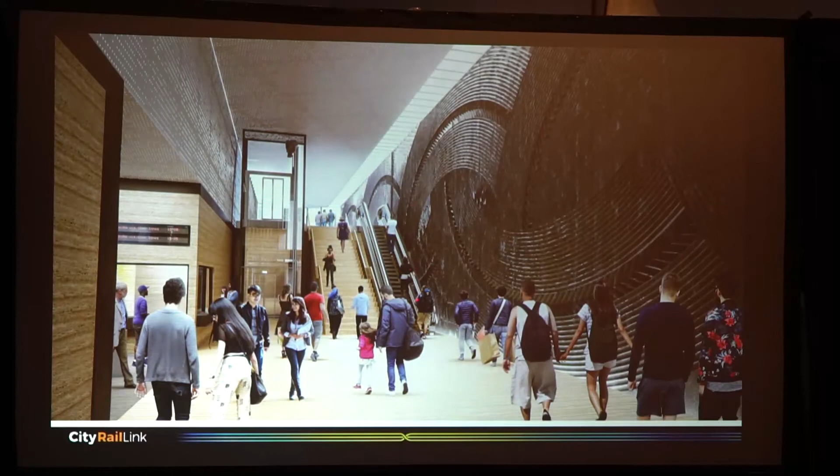The concourse itself, and what we do have as part of the Mount Eden development is the station group control centre, so the control centre for the network at this point. All the above-ground plant. It's not an underground station at this point. Most of the surface requirements are within a surface building, but an opportunity to explore the significance of this element. I guess with Maungawhau, we're excavating a significant amount of basalt, and we've identified an opportunity there to recover a lot of that basalt, to explore the opportunity for that to be used within the built environment itself.

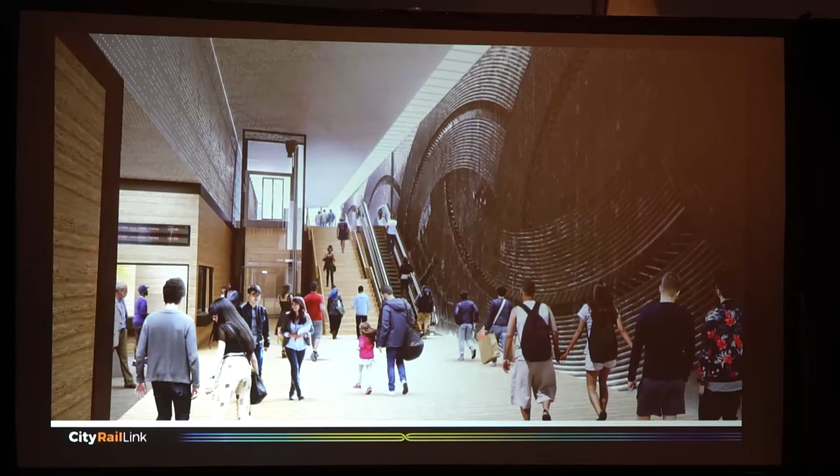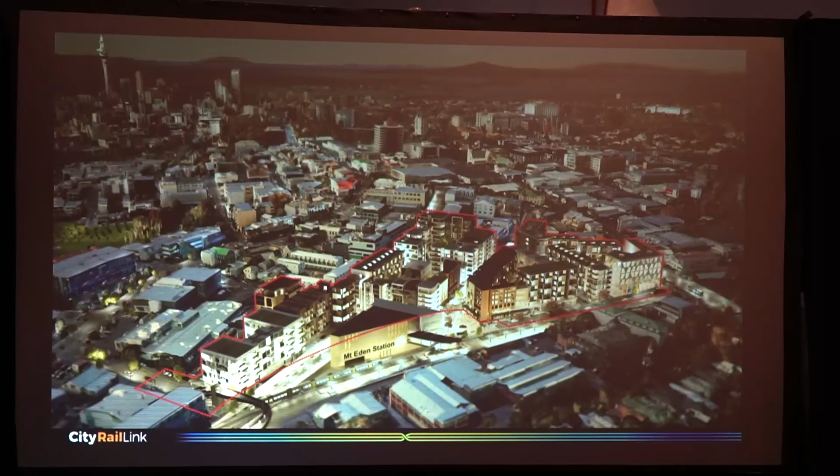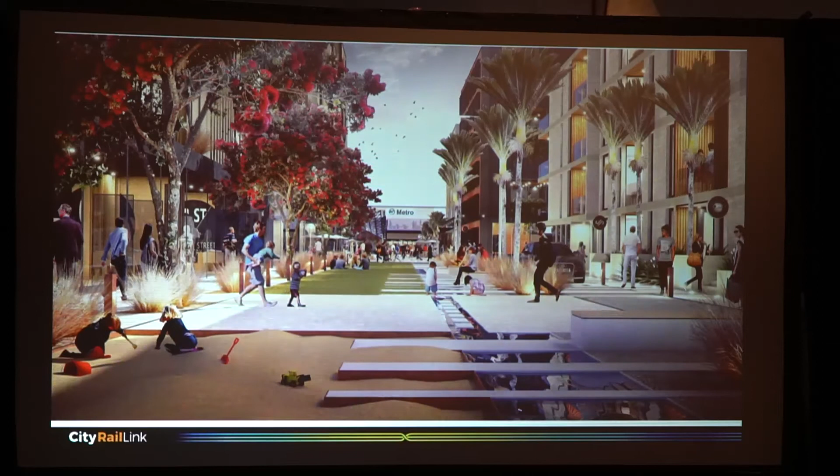What might the reinstatement look like within the current unitary plan? So the red outline is the NOR, the 2.4 hectares as John described, and this is the density that's possible under that unitary plan. And again, we set the streets up, and then the opportunity comes within this. So this is Ruru Street. You can just see the bridge across the rail at that point, the station building, the view to the Maunga, and the new developments as a possibility. We see Shaddock Street as a key, the plaza that we saw before at the terminus of this, but very much a pedestrianised linear park opportunity.

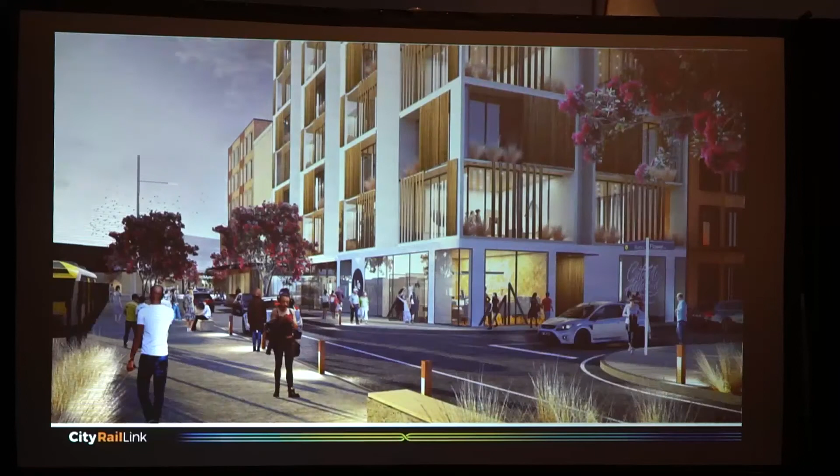Existing NAL at this point, we're approaching from Mount Eden Road. You can just see the station in the background here with, again, the opportunities for the mixed-use precinct with Flower Street to our right. I think it's also worth pointing out that this will create the potential for probably a residential area of about 3,000 people, all within about 4 minutes travel time of trains every 2.5 minutes. So an incredibly attractive proposition for an inner suburb, having direct connection straight to the city centre itself. Thanks, John. And a number of new pedestrian bridges and connections to deal with the southern connection to the station.

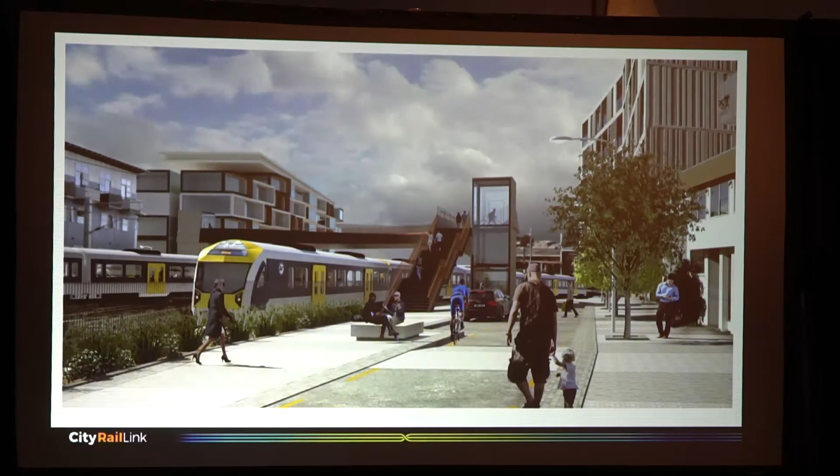So John's just finishing with the rolling models, but that's a bit of a snapshot of the design. But as we mentioned, the key challenge for us has been to write requirements. We've used terminologies like mandated design, but we're trying to preserve the framework so that the D&C doesn't lose the opportunity. So that's been our challenge in the last 6 months or so. Absolutely. The D&C tender process is always one where one might feel somewhat scared of losing some of the content that we've got here.

I am pleased to say that through that process we actually have what we call the mandated design philosophy, which we have preserved. I fought very hard for that with the support of the project director, and Chris's team have supported us delivering this mandated component that will guarantee us the quality of the things that you've seen here in terms of the architectural expression, the expression of the narratives that we've taken great pains to develop with Manawhenua with us as design partners, and making sure that we deliver a really good product at the end of this, rather than something that's pretty average and that looks like any other railway around the world.

So we hope you've enjoyed the presentation, but are there any questions? Yes. What sort of interest have you had from developers like at the top of Mount Eden? You're talking about a residential sort of precinct there. Is there much interest from potential developers? We believe the interest is there. It's probably a little early because we know we can't release that site until we finish construction. So we're looking at a 2024 opportunity to step in and undertake the work.